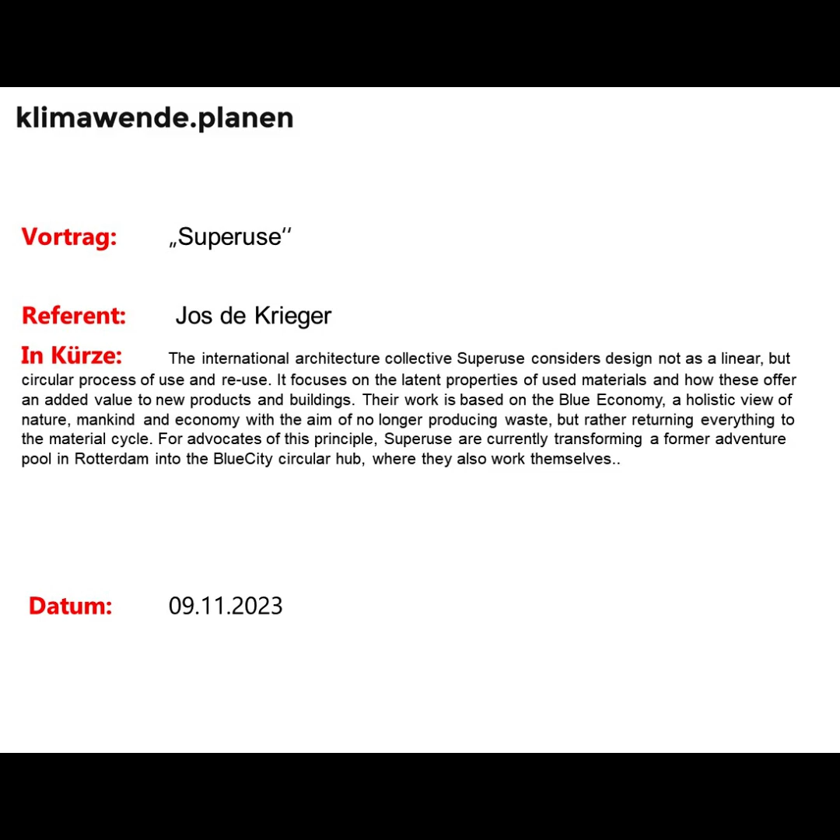Yeah, glad to be here tonight. Let's see, I don't want to see that screen.

Great to be here tonight and to talk some more to you, and great that we can do it online instead of coming to Munich again. I hope to be back sometime soon, maybe again during the MCBW, because I was there in May, as Bernhard mentioned. We'll see where it takes us.

Tonight I'm going to tell you two things. I'm going to talk a bit about Superuse and the theory behind our work, some of our projects where you see it come into practice, and one of the projects that is sort of a dear child of mine, BladeMade, that is going through all these years. It's not going to be chronological, so just bear with me, and please feel free to ask questions at the end.

Recently we started to call what we do the architecture of transition, because we see that we are in a phase where society needs to change. We need to transition, and change feels like something sudden. Transition feels like something slow, because the things that we want, the things that we envision, are not going to happen overnight.

Actually this year we are a 25-year-old office. We started at the end of 1997, and we're a pretty small group. I joined in 2006, so not from the start, but a pretty small group working out of Rotterdam mainly, but I also have my place in Amsterdam where I am right now.

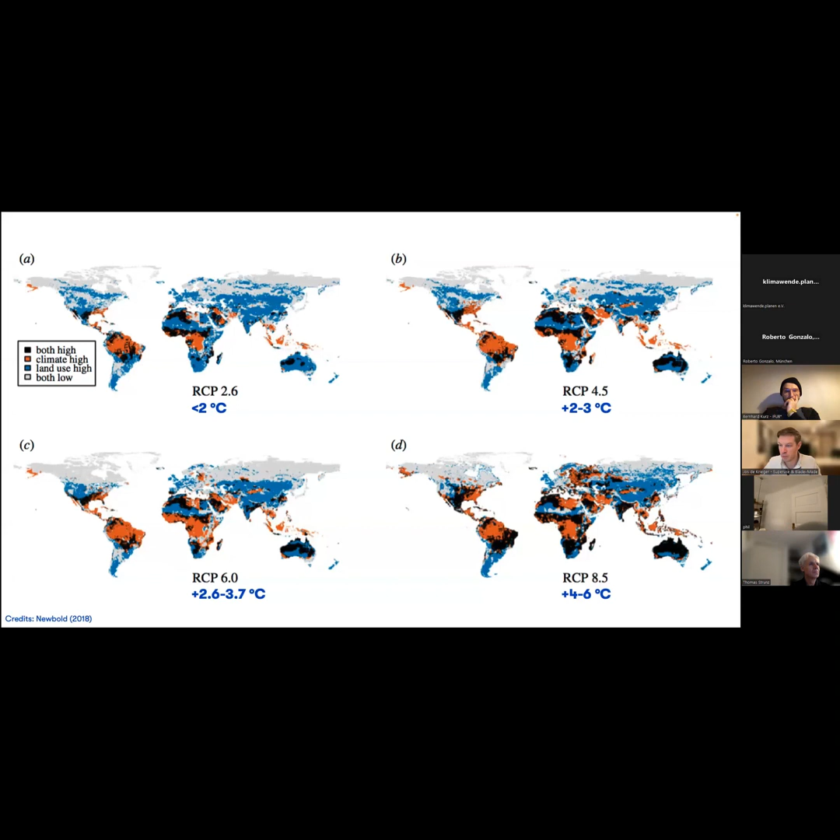Actually, the most right-wing parties that are anti-migration should be heavily into climate measures, because that is the main thing that can help limit migration.

Some things might be really hard to achieve, like a social foundation of housing for everyone without the problems we have in land conversion or biodiversity loss. That is not answered by these schemes yet. That is something that we, considering most of you are also architects, have to answer, in my opinion. With Superuse, we look at that in a way to go towards regenerative architecture.

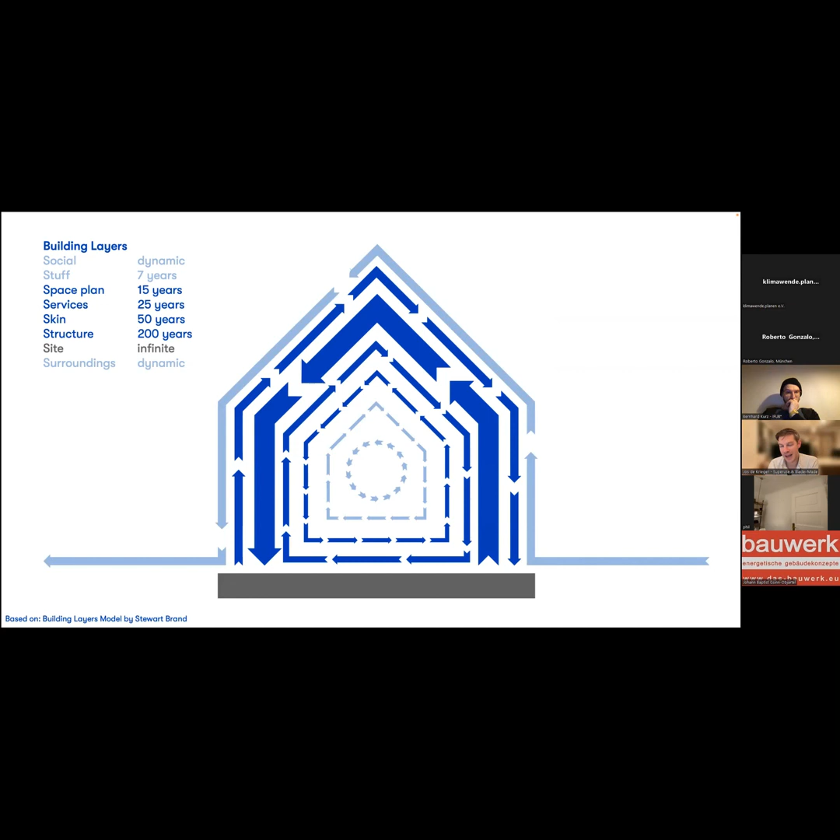And the way we look at that is by making buildings build up in layers, like the Stewart Brand model, where the most important thing is that things are demountable. So you can take apart and reassemble infinitely, or until a certain material is really end of life. The other thing is a very simple decision tree that we use in the office.

Prevent first. So if a client comes to us and asks for a building, we will first see if we can solve his problem without making a building, which is unlike what architects normally do. But maybe he doesn't need a building. Maybe he needs a different business model, or there's a building nearby that would be suitable, so you can reuse an existing building and transform it.

So it's really weird in a way that we don't necessarily want to build as much as possible, but we want to leave positive impact as much as possible.

The way we do that during a project, looking at materials that we use, is we aim for reused materials, preferably local or regional, depending on what's available. If that's not available, we'll go for bio-based options. After that come the recycled versions, so recycled aluminium or recycled concrete or recycled whatever. It's not necessarily bad, but it's usually better to use bio-based. And if those recycled versions would not have been recycled but reused in the first place, well, that would be even better.

And of course, in most projects, we can't really go around conventional materials still. But if we have to use them, we'll try to go for reusable in the next phase, next life. So we always think about the demolition of our own projects as well, or recyclable, or at least durable.

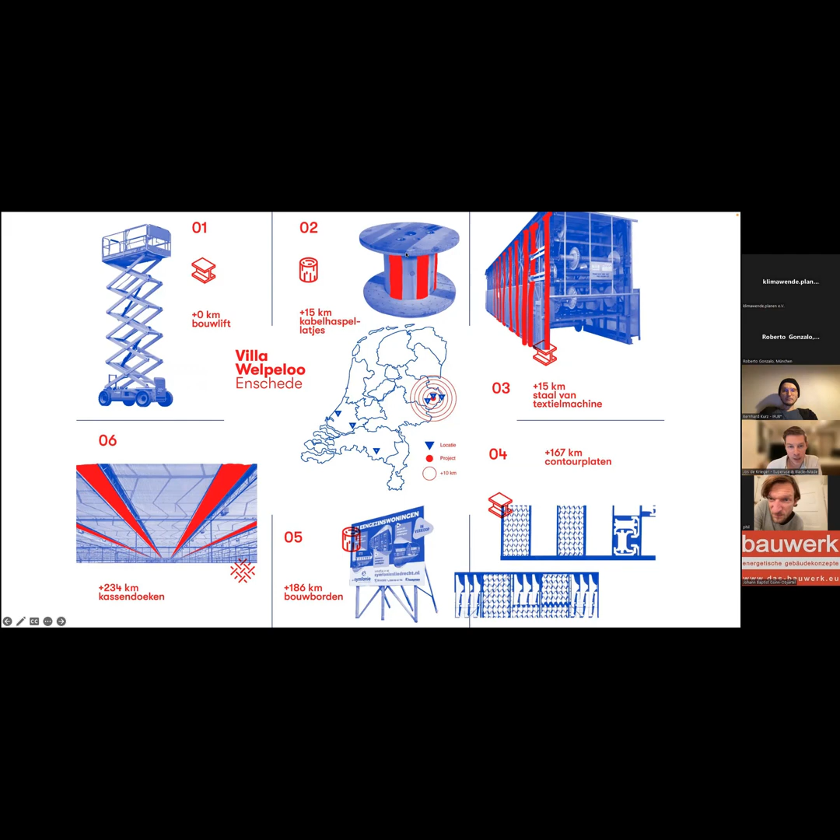So for the facade, we've taken these middle slats out of the cable reels. They have no nails; the only thing they have is some sort of bites taken out of them. You'll see it in the next picture.

But that is still reuse that you see, which people could call aesthetic reuse or something like that. But it's more than that - the insulation on the inside and the steel structure that you don't see are completely reused.

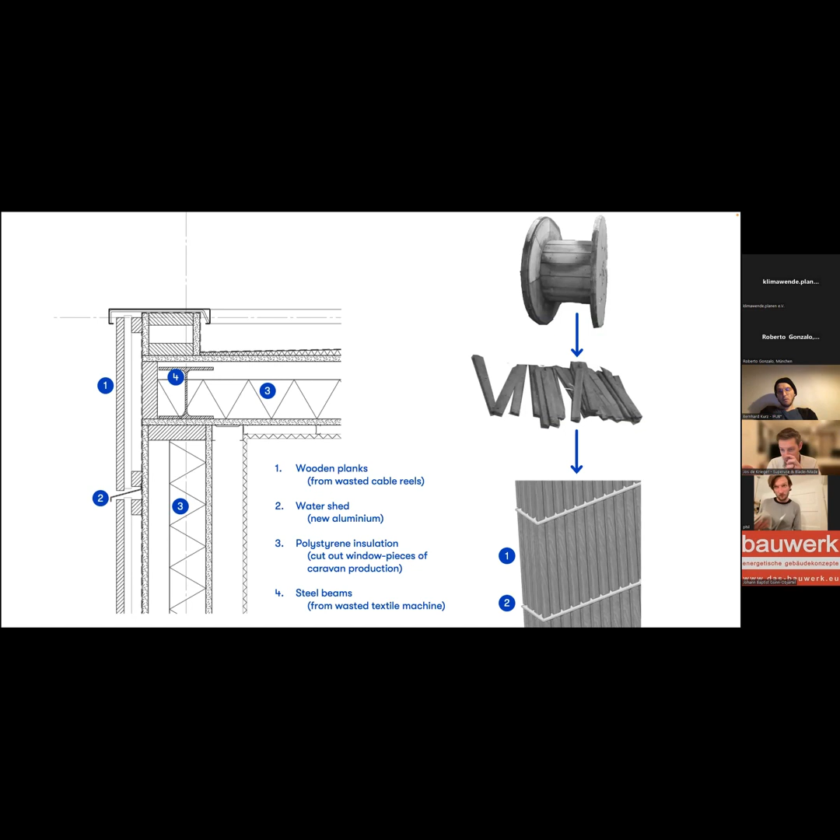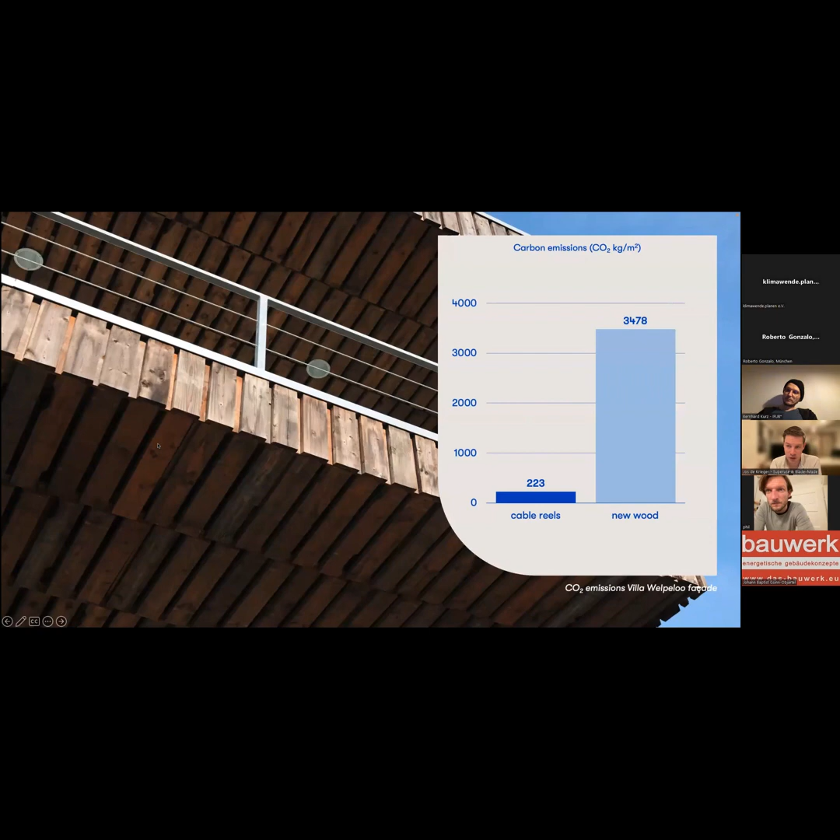So for the cable reels, here you can see some parts on the left, for example, where the wood is not perfect. And that's something we actually like because it gives another story to that facade, to that building. Reusing that wood roughly saved 95% on carbon emissions compared to conventional wooden facade solutions.

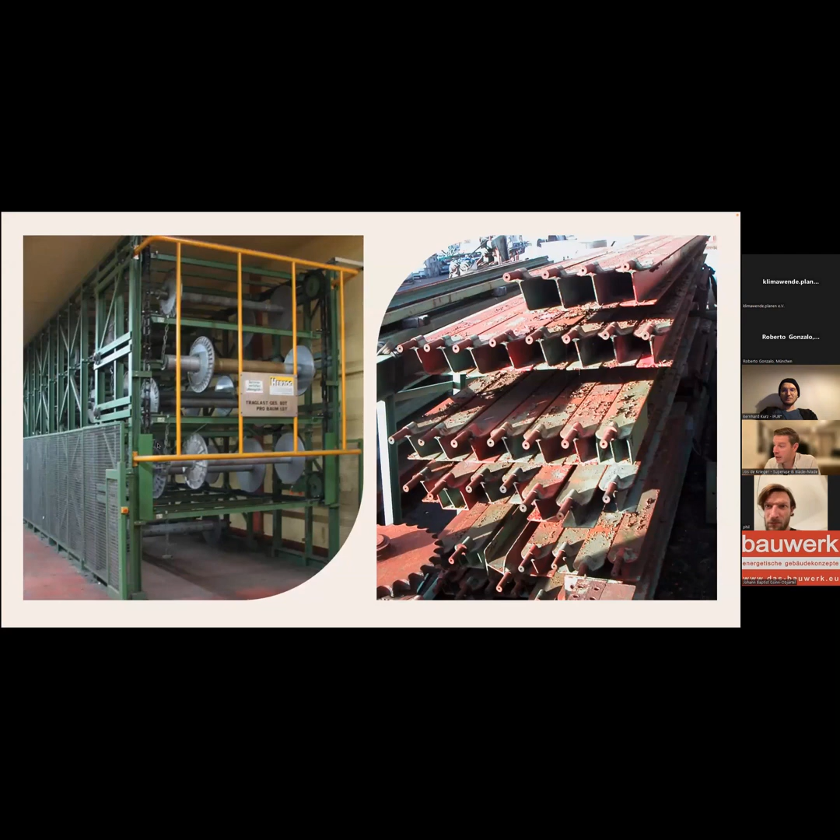Then for the steel structure, we used this textile machine, and these beams were just lying around. We didn't know the quality of that steel, which was of course a problem because we wanted to construct a house, we needed to get a permit, etc. What we were able to do was tell a structural engineer to calculate how much this steel could handle if we assumed it was the worst quality of steel available around the time that machine was constructed. And if that would suffice, then probably the permit would also agree it would be enough for a house. So that's exactly what we did, and that's also how we got it approved. And by reusing the steel that was available, we roughly saved 90% on carbon emissions compared to a conventional new steel building.

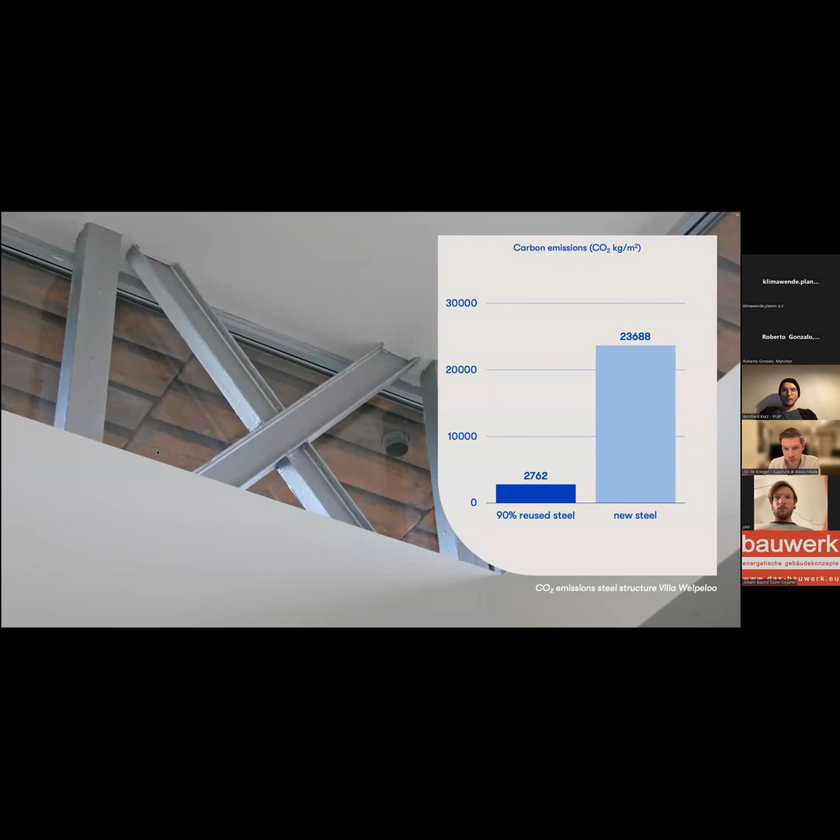This villa was completed around 2008, so roughly 15 years ago. It's still standing, the facade is looking good. Of course it became a little grayer, as you could see in the first picture. These grayish curtains are curtains that we took from greenhouses, where they're used as sunscreens. The cable reels are reused. The window frames are new and proved to be actually one of the most problematic parts during construction. But the residents are still living there happily, and I'm looking forward to see what happens in 10 years, or even 35 years from now, when the building changes again.

More recently, a project we did in Eindhoven, also somewhat in the south of the Netherlands, where we were asked to renovate an old school building and make an extension to it. We're always happy to do renovation because that keeps old buildings intact, but not all functions are suitable in a renovated building. So in this pavilion, where they host openings and art exhibitions, there's a bar as the main function. It's here on the brink of a workers' neighborhood and the former Philips factory terrains, close to where the Dutch Design Week is held.

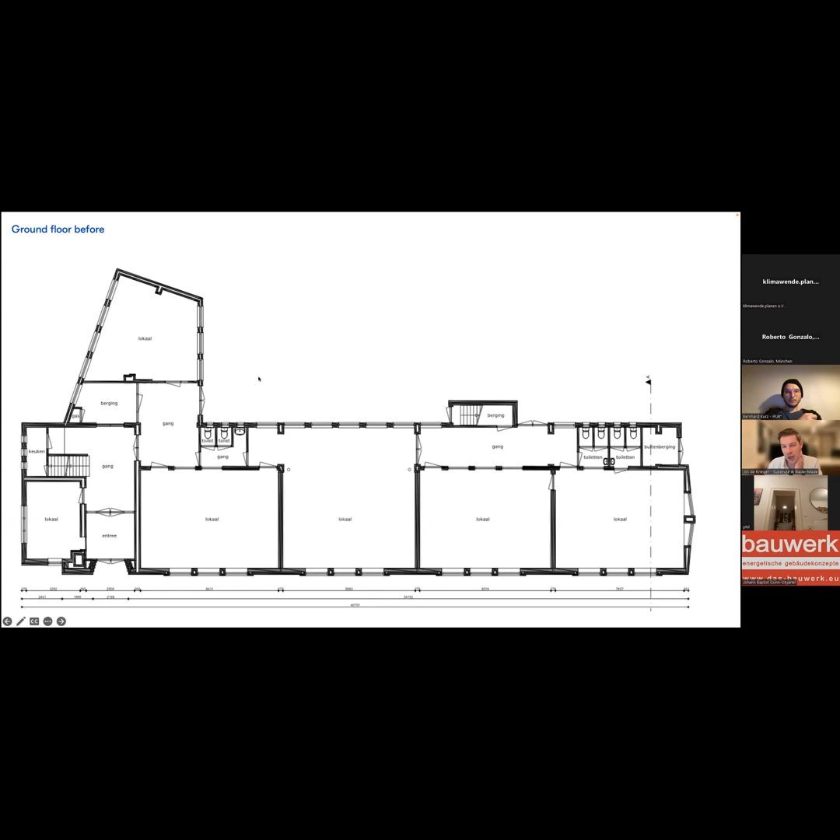People who used to work there are now living there, and it's close to the city center. This monumental school building was going to be renovated, but over the years some things had changed, like this hallway being blocked by toilets that were added at some point, so it wasn't really the school building it used to be. We changed that, went back to the original positions, and added a building on the schoolyard for the kitchen and the cafe.

Again, we made a harvest map, and some of the things we could harvest came from the former factory terrains of Philips. Some came from a little further away, but altogether most of it was found in the Netherlands, within roughly 100 to 150 kilometers from the site.

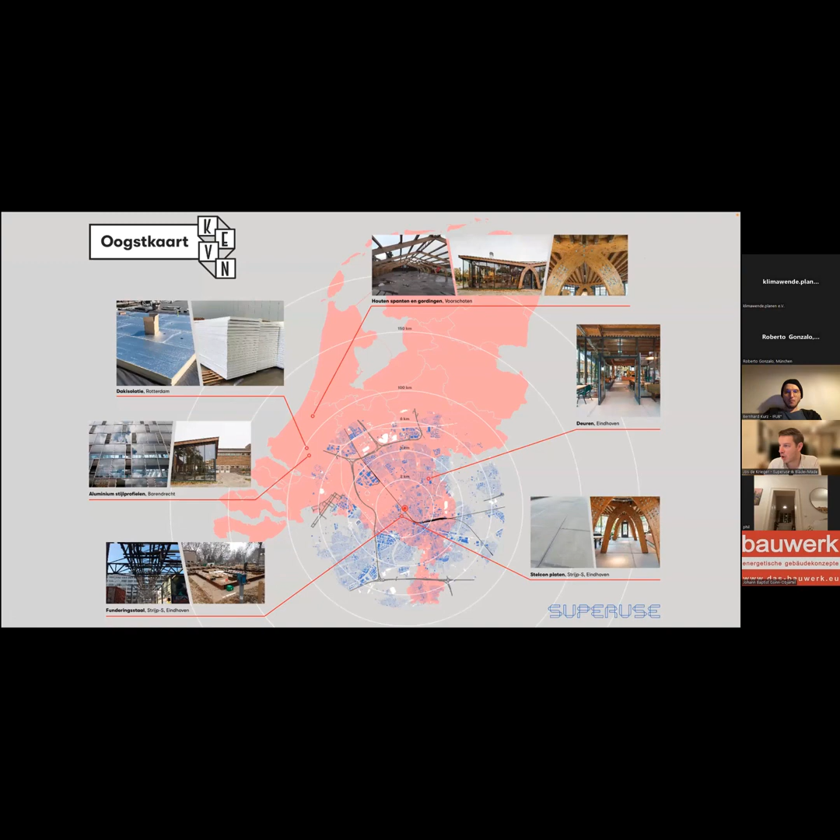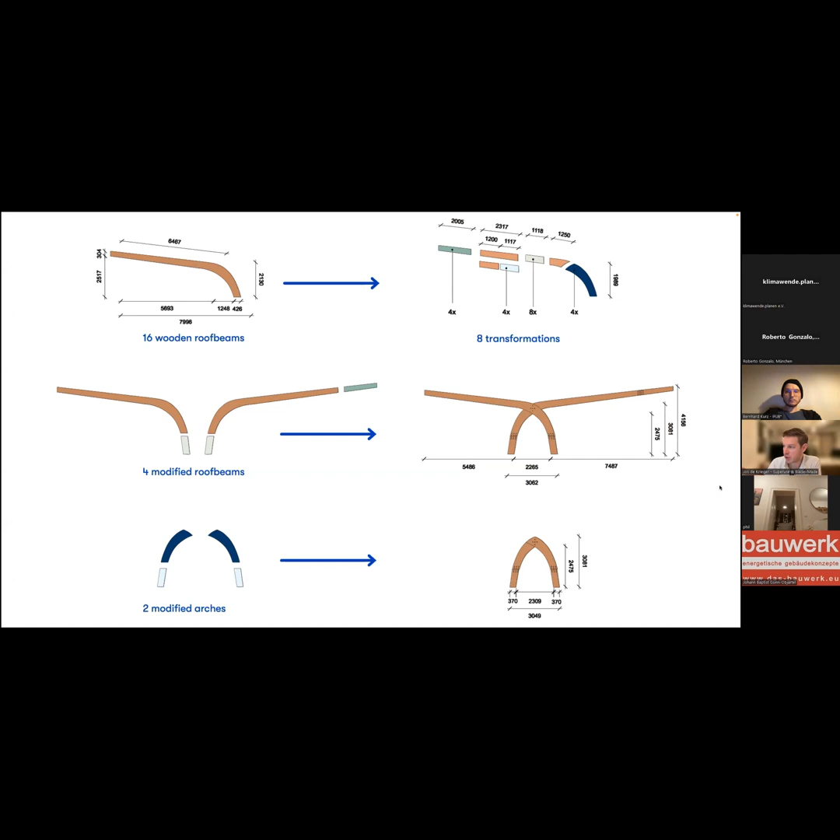For the wooden roof beams, we found a former goat shed standing on farmland somewhere. By cutting it and measuring it precisely, cutting it into certain pieces, we could make it a little higher to make it suitable for human use, to walk under and create that cafe space.

With just these few cuts, we had to add metal plates in the middle and a lot of bolts to make it a structural connection again, but we like that kind of expressiveness. The wooden beams in between are just the beams that were already in the farm shed before. And the whole thing is demountable.

There are no foundation poles. There are 3 layers of Stelcon sheets, reused concrete slabs, for the bottom structural layer. Then there's an insulated layer, and a floor heating layer. So we've reused existing concrete slabs to create a heated floor.

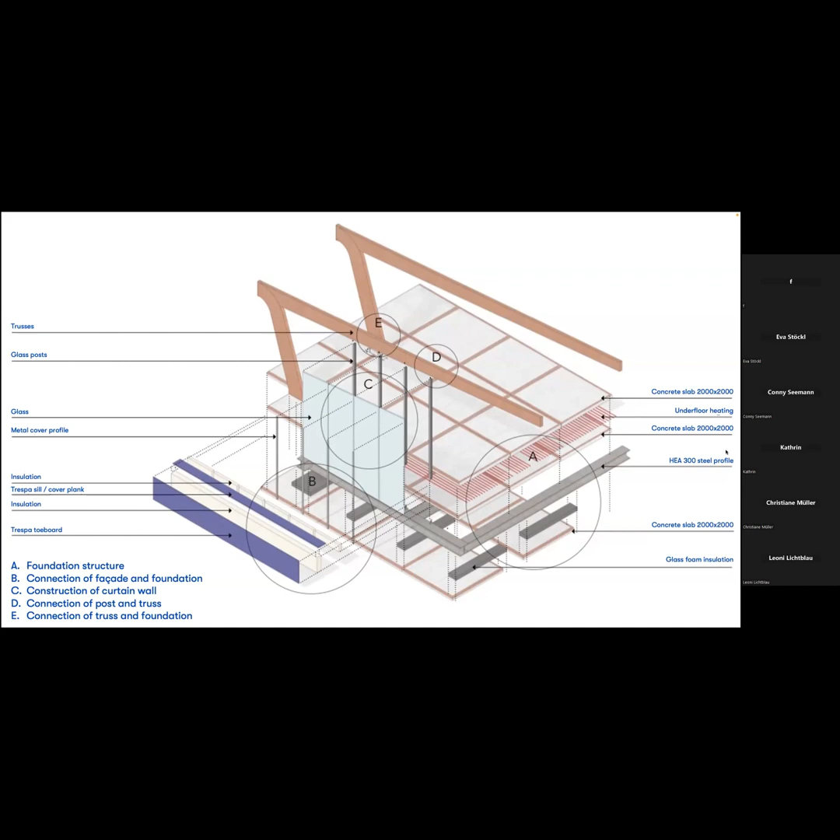Well, this space has now been in use for, I don't know, 5 years or so. And actually here in the back, you see the photographer was busy, but I was also giving a talk for a German TV program at the same time. So that was quite funny.

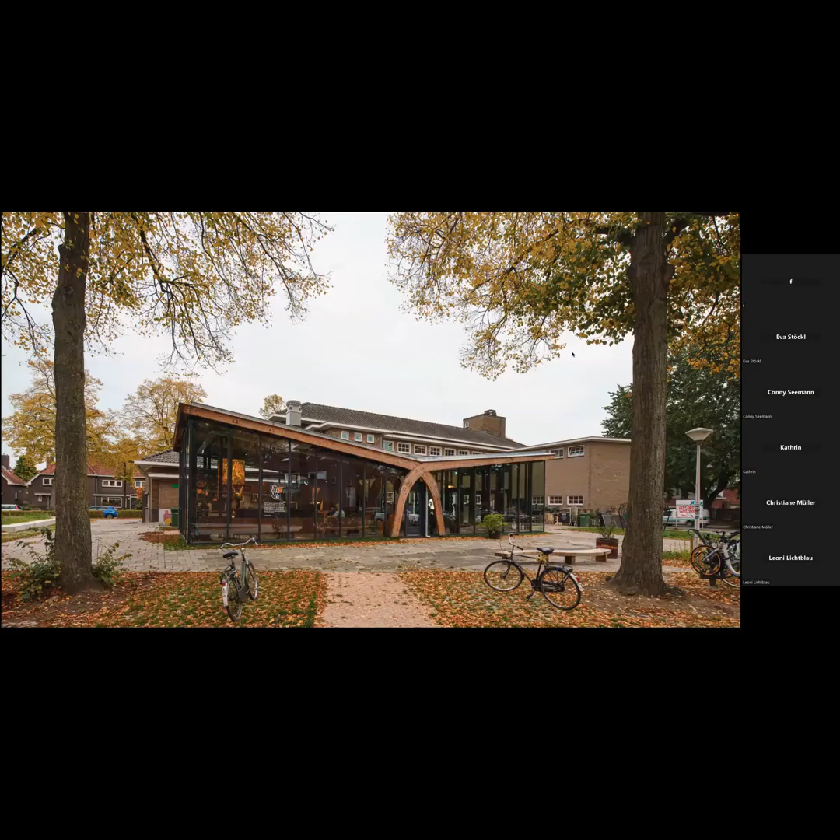But yeah, if you are ever in Eindhoven, go for a visit. Or when you're in Rotterdam, stop by at our office. It's also a pretty special place.

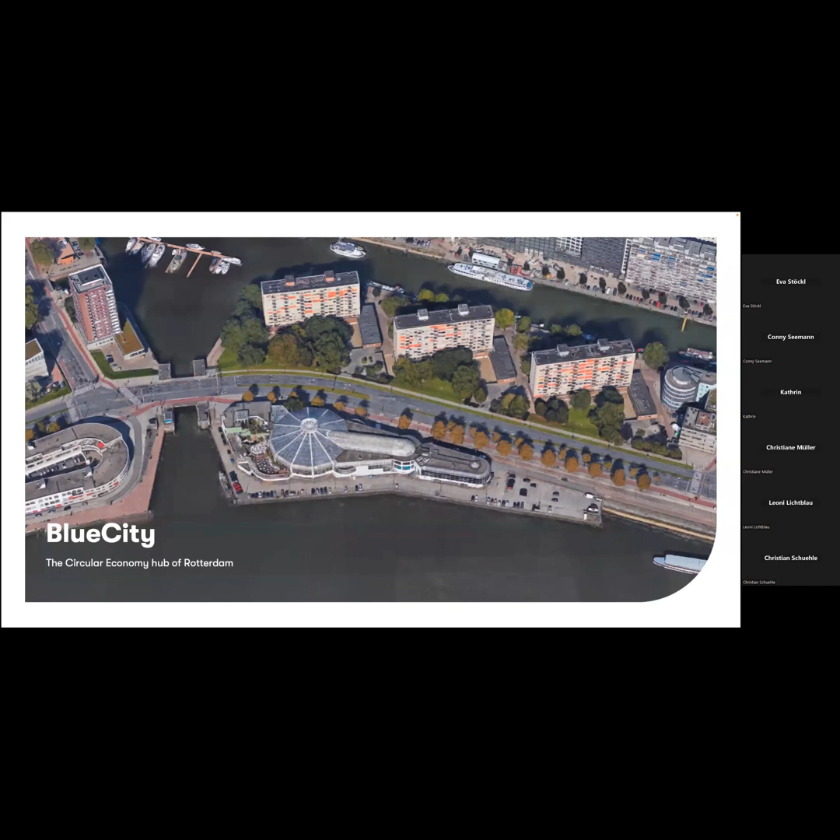This is a former subtropical swimming pool. So when we found it, or how it was originally meant, was like this. But at some point it went bankrupt, it closed. And of course, all the water was gone.

We were already inside a couple of times because we harvested the plants for our office and some hotels like the Hilton, which were nearby our office back then.

But when we came back years later, it was like this. All the plants that remained were dead. The water was gone. It still looks like a swimming pool, but it feels completely different.

It feels like a sort of urban photography setting, where you go into these ruins. But it was still actually in quite a good shape.

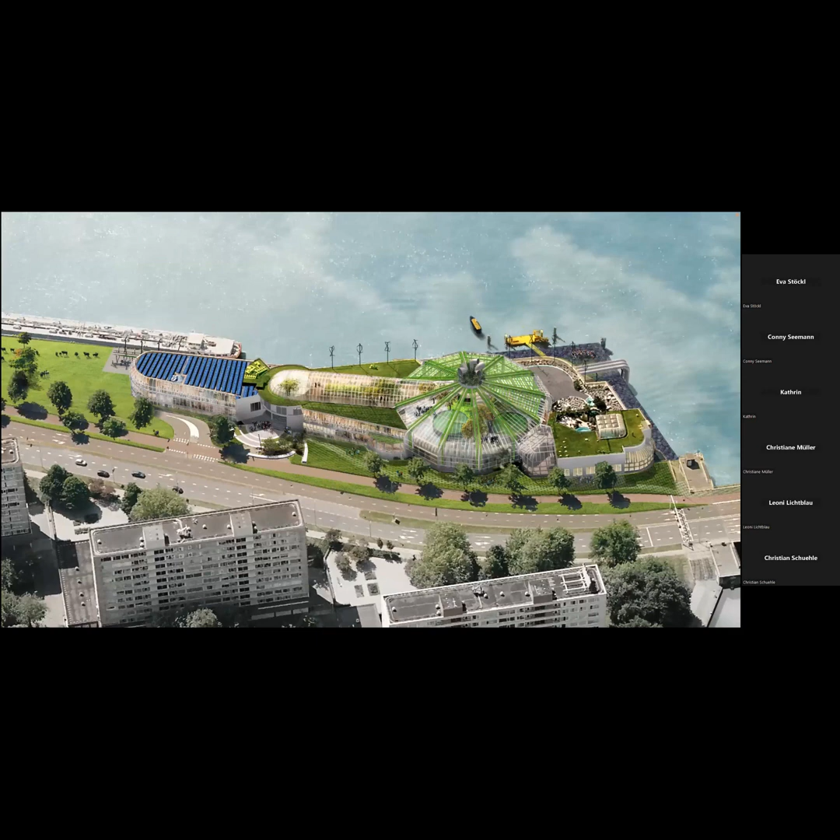And it was going up for auction. So we came together with a group of pioneers with a plan to say, can we save this building from demolition? Because normal project developers would demolish it and go for housing.

But as you can see in this picture, there are some pretty big apartment buildings next to it that have riverside views right now. And if a developer would build something new there, that would probably mean years of conflict with the neighbors about obstructing their views, etc.

So we thought we might have a shot at buying that building at an auction. We found an investor and a couple of pioneers with a plan to transform this monofunctional monster into a circular city of the future.

We actually managed to purchase it with the plan to not go for one grand design that takes 5 years of construction, followed by a grand opening where we then see how it goes. Instead, we go in with the plan to transform it steadily, basically treating it as a continuous renovation and reconstruction where companies move in, companies grow, companies move out.

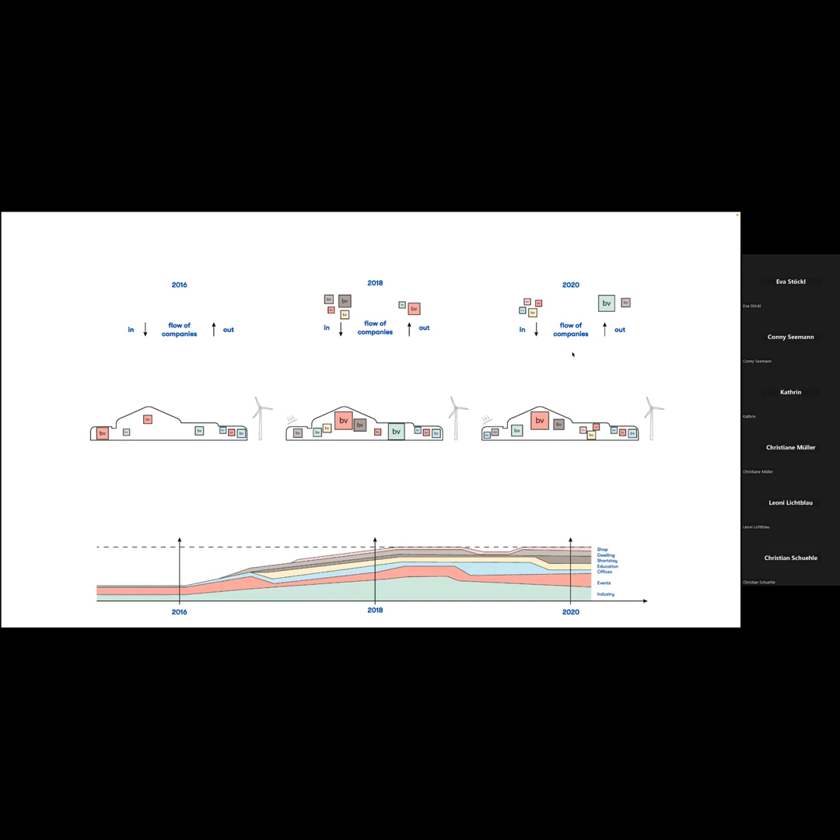So we've actually had our office in 3 separate spaces in this building already, smaller or bigger, depending on the vacancies available or the size of our office at the time. We shrunk a bit during Corona and rented out one of the other spaces that we didn't need anymore.

Over the years, we would like to see all these companies connect their energy flows together, connect their value flows and their physical flows, so that they cooperate, learn from each other, and use each other's materials and waste flows.

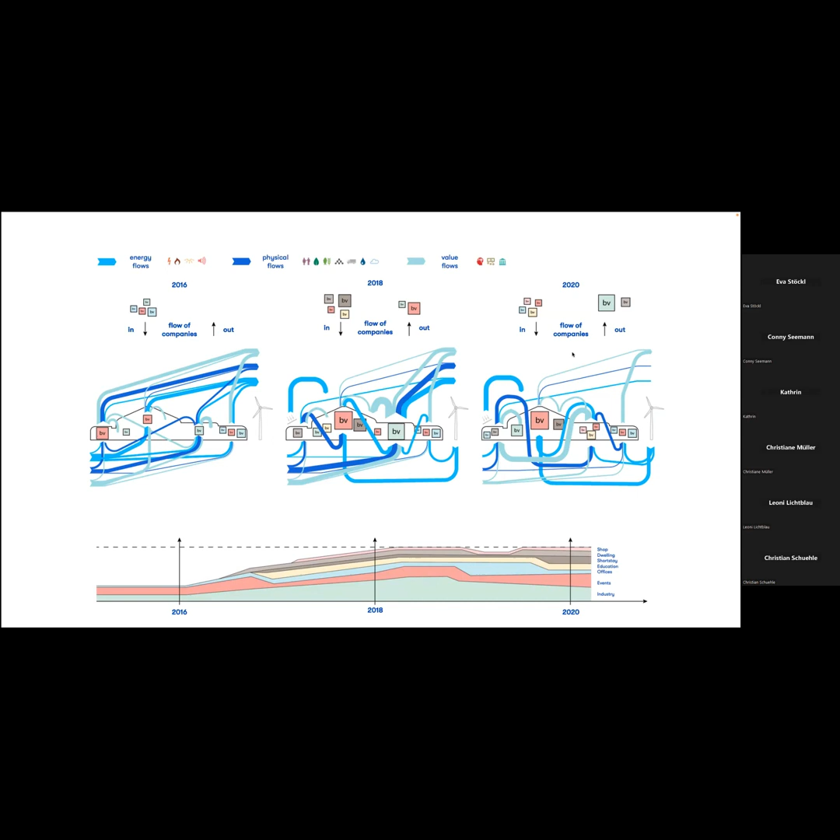For us, of course, as architects, we are mainly looking at the building and the reconstruction of it. So some parts of the former swimming pool are kept intact.

But we added all the window frames to create climatized office spaces. We kept the VIP booths, but gave them a new paint job and new upholstery. Instead of brown, red velvet and brass trims, it is now more a suitable workspace.

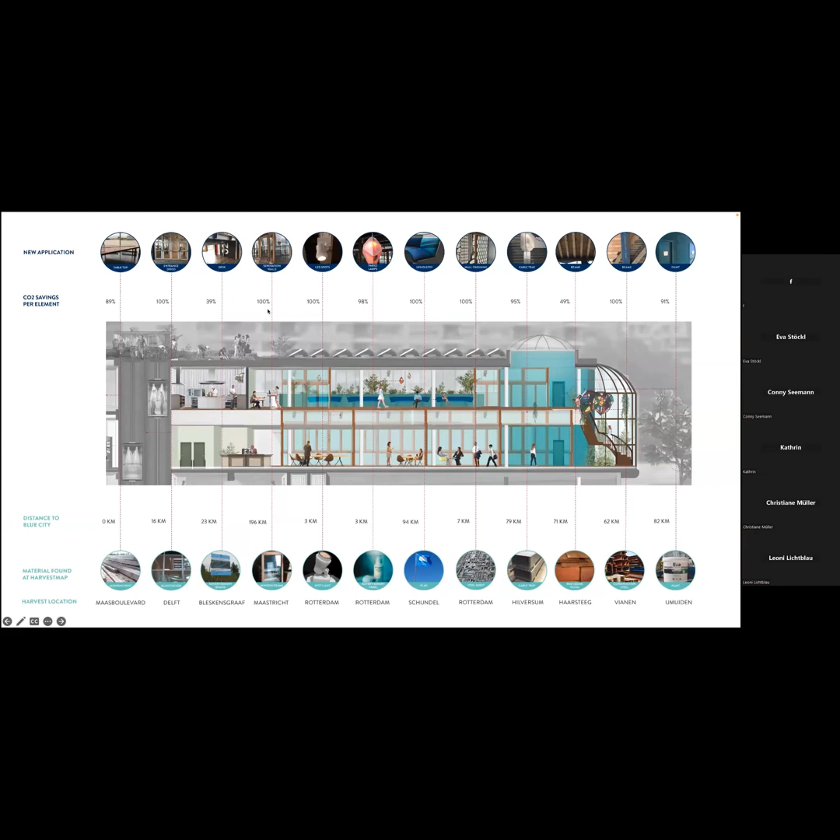So when we redid the basement, we created a dry lab and a wet lab, a place where young companies and pioneers can experiment with seaweed, fungi, and new materials, hopefully suitable for architecture later on. We did another type of map, also looking more at the carbon savings.

By reusing the materials here, we saved enough carbon to go back and forth between BlueCity and Paris 652 times, where at that moment the Paris climate conference was being held. So probably the whole Dutch delegation would have been able to go there for the negotiations, offset by this renovation.

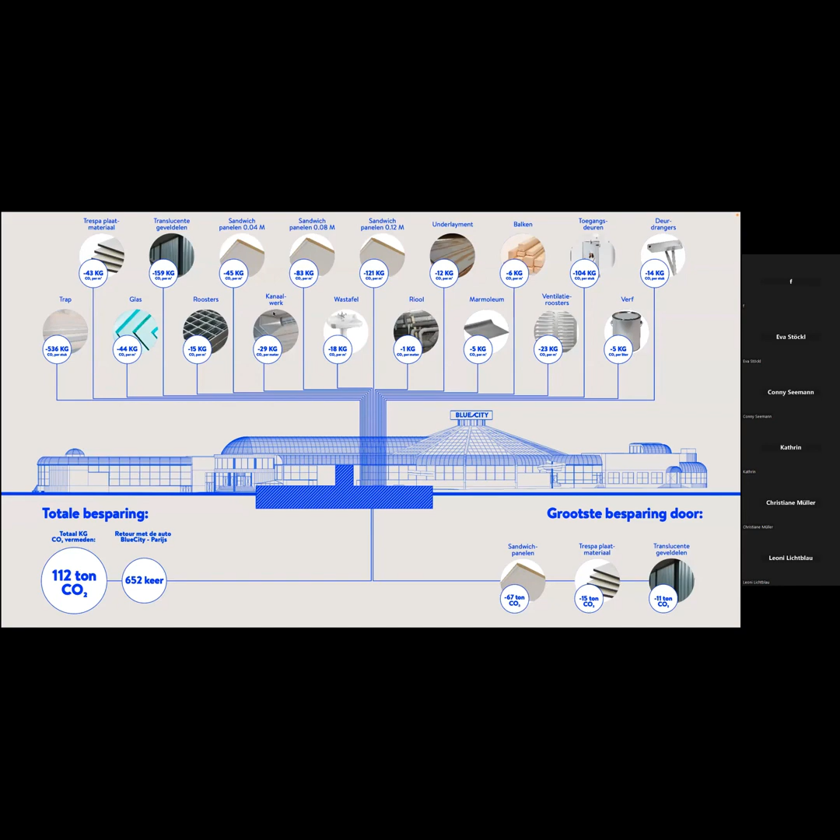Well, finally, a project that is under construction right now and almost finished. The inhabitants just moved in, but they are finishing the building themselves. This is maintenance cooperation or housing cooperation called Boschgaard.

What they did is they squatted a former neighborhood center.

And when they were asked to move out by the housing corporation, they said, well, we actually live here pretty happily. We reinstated some of the neighborhood functions because when they squatted it, of course, the neighborhood center was gone. And we are running this urban farming plot next door. So can we find a solution where we can stay here and maybe build the houses for us with us?

And actually the housing corporation, so the owner of the land, agreed. And they asked us as architect to help them with that problem.

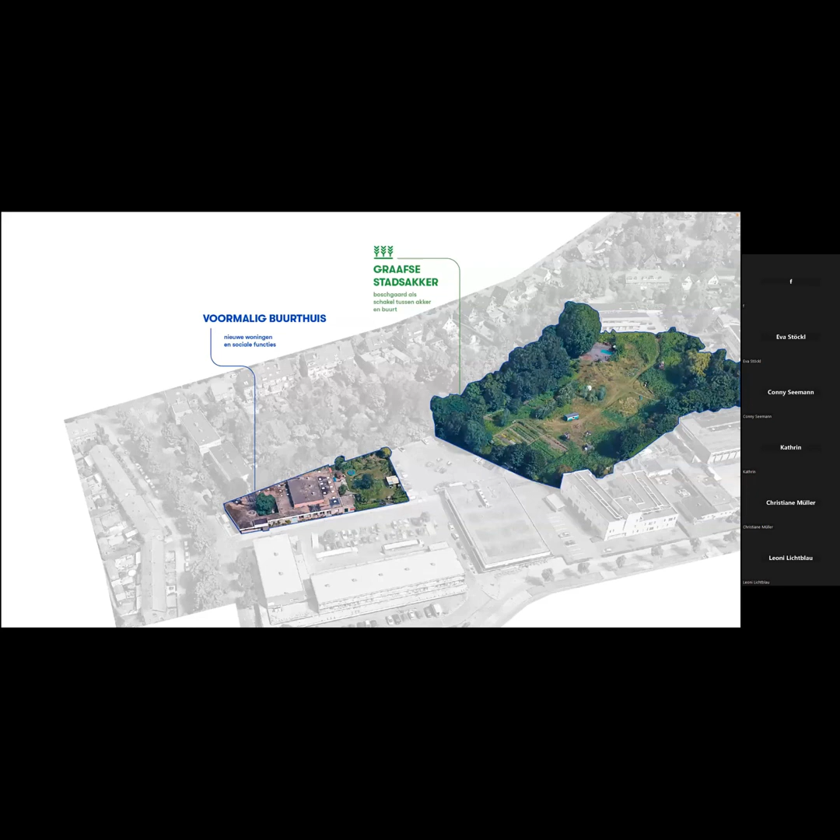To do that, we suggested to keep as much as possible of the existing building and add a small part where 5 studios are inside, where the foundations were strong enough, and 3 extra housing units where there's 4, 4, and 6 dwellings inside, for the future growth of the community as well.

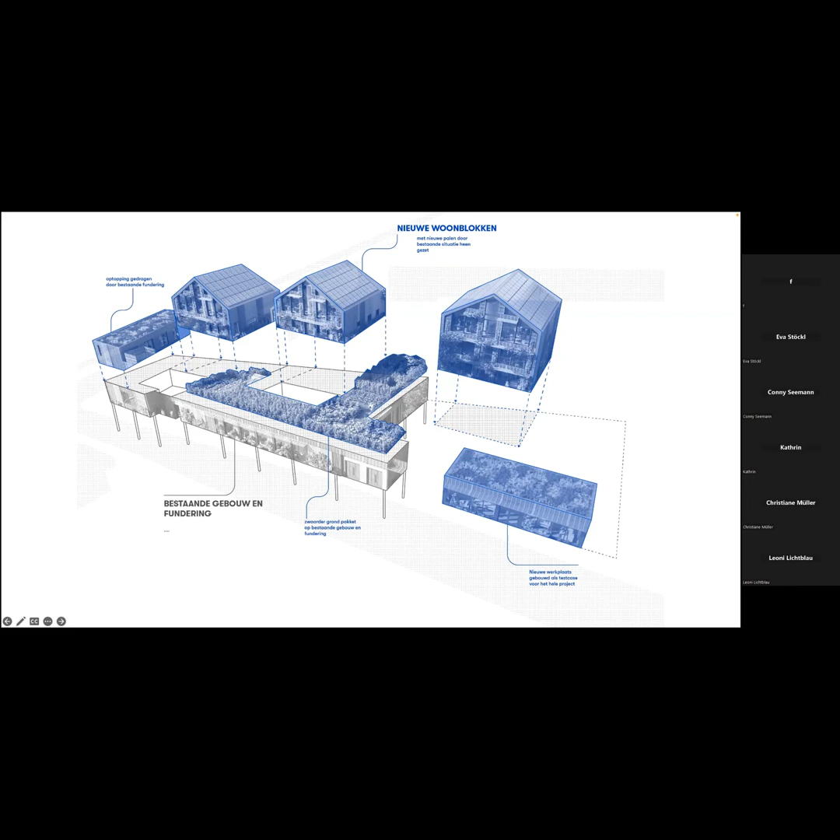But the angle of the roof, so the pitch, turned out to be a little bit different than what we had in the permit. So we had to go through a small process of permitting again, with negotiations with all the neighbors, because before we drew the pitch, we didn't know exactly what kind of material we would find.

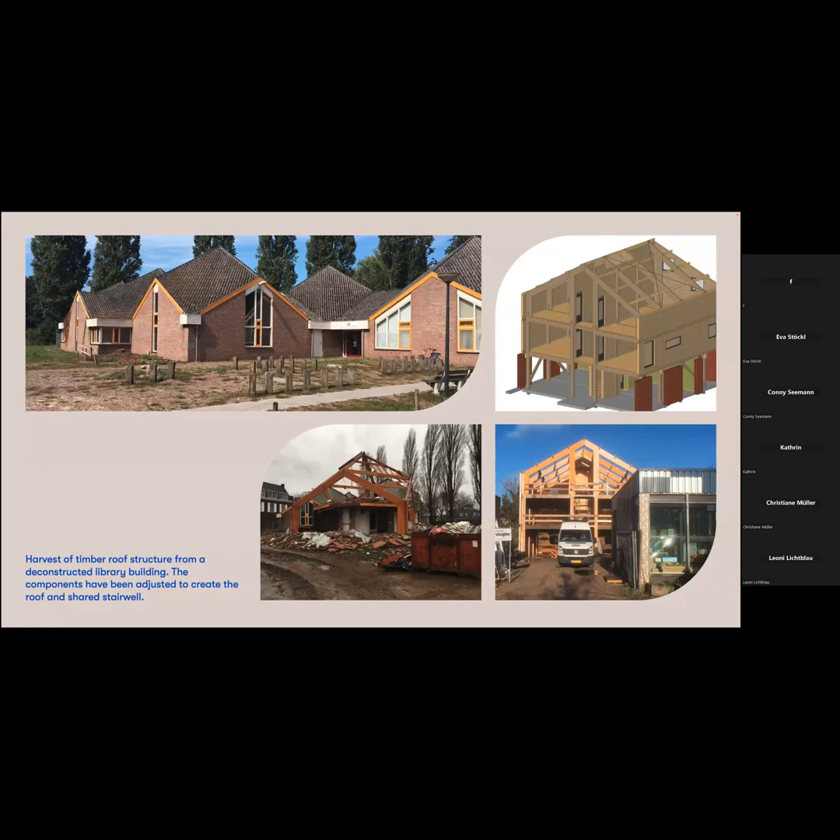But here, the whole structure is bio-based and reused. So for the top floor, you can see these parts from the library. And for the lower floors, we have these beams from a gas station that were taken down, cut into pieces, all according to the drawings of the structural engineer.

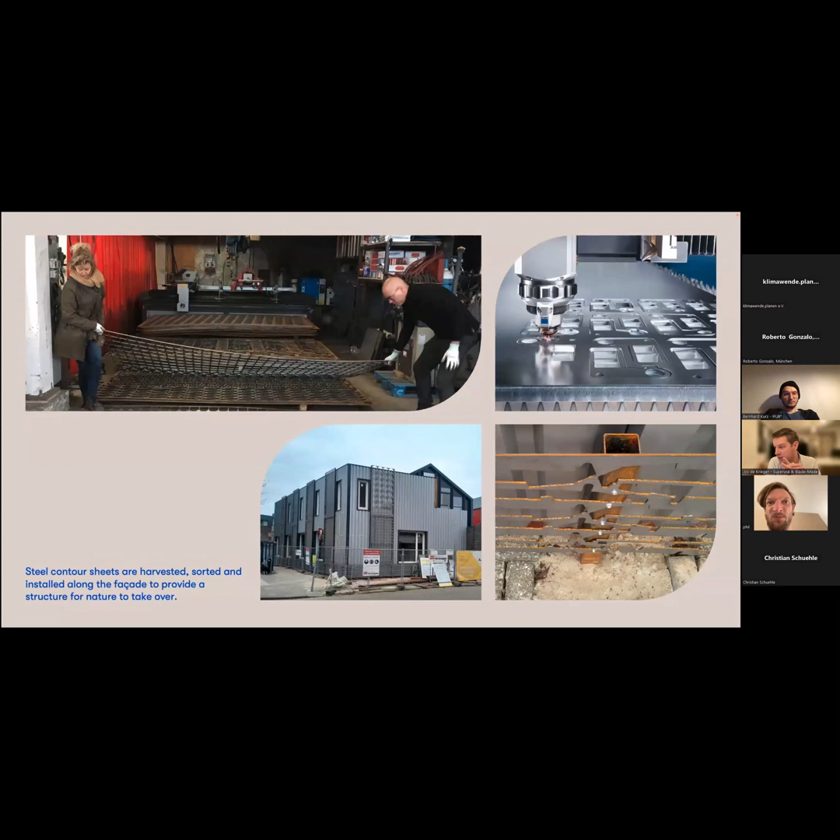And finally, some of the things that we use a lot actually are the remnants of our steel industry. So everything that we use—cars, door handles, etc.—they're usually cut out of steel sheets, and the steel sheets with holes are thrown away, going into recycling, becoming new sheets of steel. But they're actually really beautiful, usually, because there's a sort of industrialized, beautiful logic behind the way these things are fit into a steel sheet.

And here they are used to grow the plants along the facade. So you can see here they are used for the solar shading as well, in front of the reused window frames.

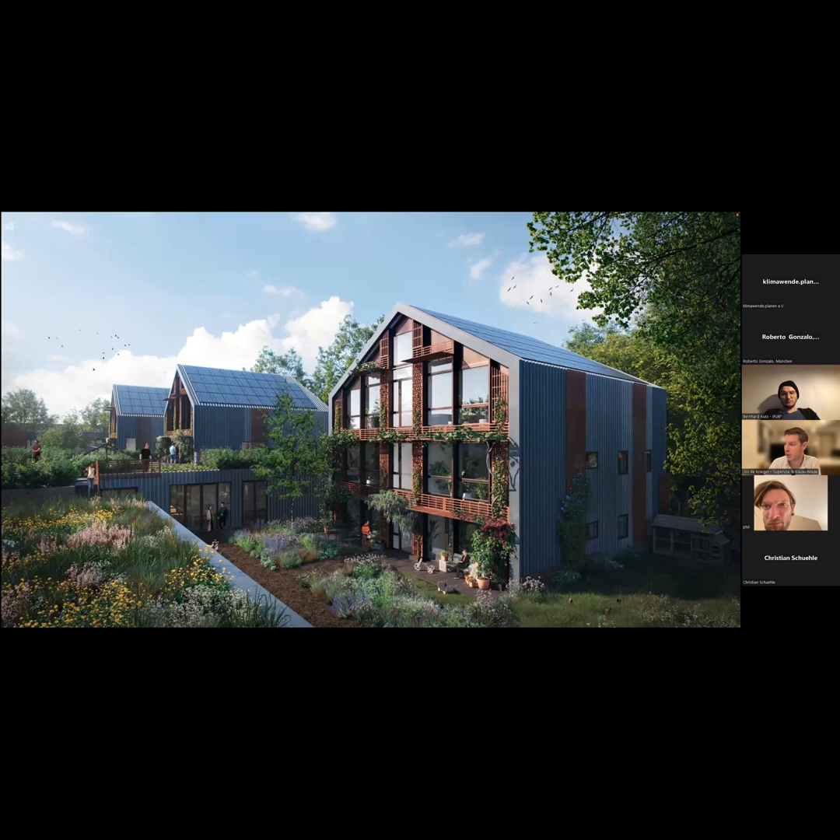The whole building is insulated with corrugated steel insulated sheets. They are available as B stock. So I would say this is coming close towards a regenerative building.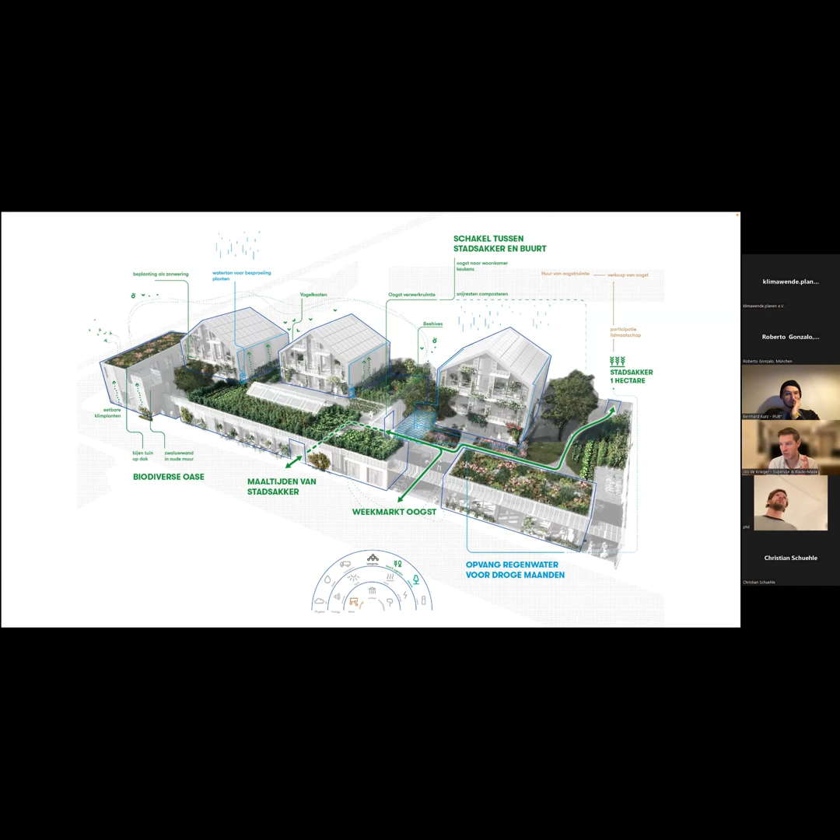They are growing part of their own food, not just on the plot of urban farming that they have nearby, but also on their roofs and on their balconies. They have bees on their own site for pollination. They have cheap neighborhood dinners that they host in their own facility. So there's a monetary value involved. There are inorganic flows, there's food flows, there's nature flows, water flows.

Sorry, my cold is playing up.

And the way we've made the housing units, they're all social housing according to all the financial rules of social housing in the Netherlands, which also meant that there was a maximum budget, a maximum cost that you can spend to make these houses. And it helps that the future inhabitants are cooperating with the contractor to do certain finishes themselves.

But most important is that their houses are not big. They're relatively small, but they have a lot of shared space. So every house has a very small bathroom, but they have an almost wellness space together with all 19 households. And by thinking in that way, you can really reduce the amount of energy that you use, not just as a family, but as a cooperative of 19 families.

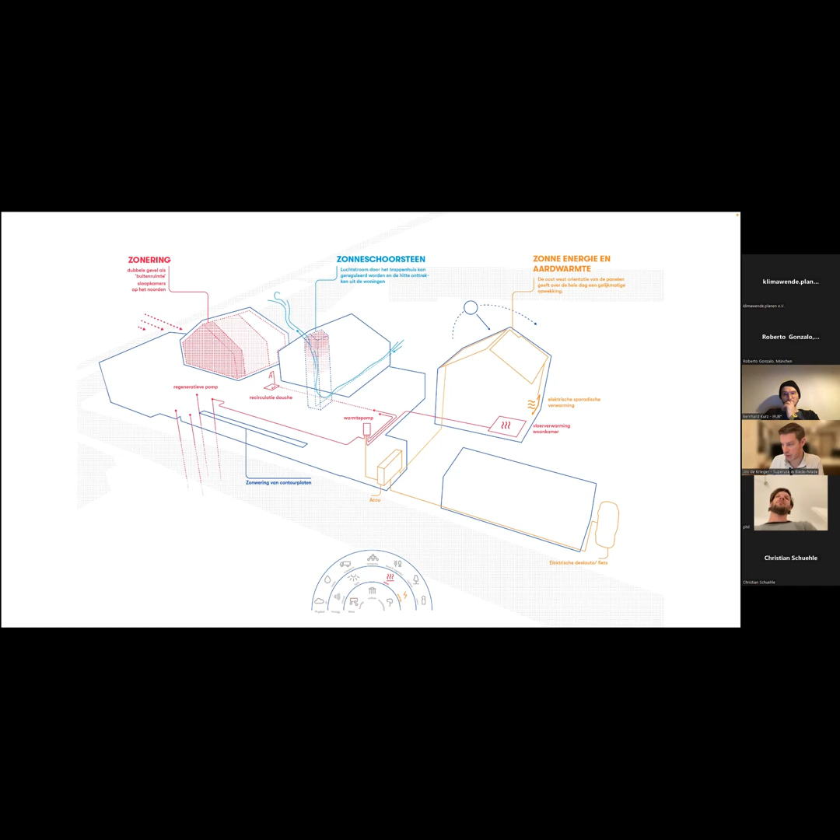Well, while this is under construction, just a couple of months ago we had a visit from the King of the Netherlands, together with some staff and people from the ministry who wanted to learn more about this way of circular construction, which is really good because it helps put it on the agenda at a lot of levels.

And just 1.5 weeks ago, Frans Timmermans also visited. I think he was visiting the German Prime Minister also last week. I don't know if it was news in your country, but it was for us.

And yeah, that's the way we would like to develop future projects, where all these flows come together, where it's not just about the building itself, but also about the community that is going to use it, etc.

I'm going to talk with you a little bit more about the harvesting principle and the different flows that we look at. This is a bit interactive, so feel free to open your mic if you want to join in.

We have a big collection of samples at our office that we've used in past projects or are planning to use in future ones. For example, different types of cable reel wood like we used for the villa - as you can see, they're all a bit bent because they used to form a circle. Or a painted version of the contour sheets, which is possible.

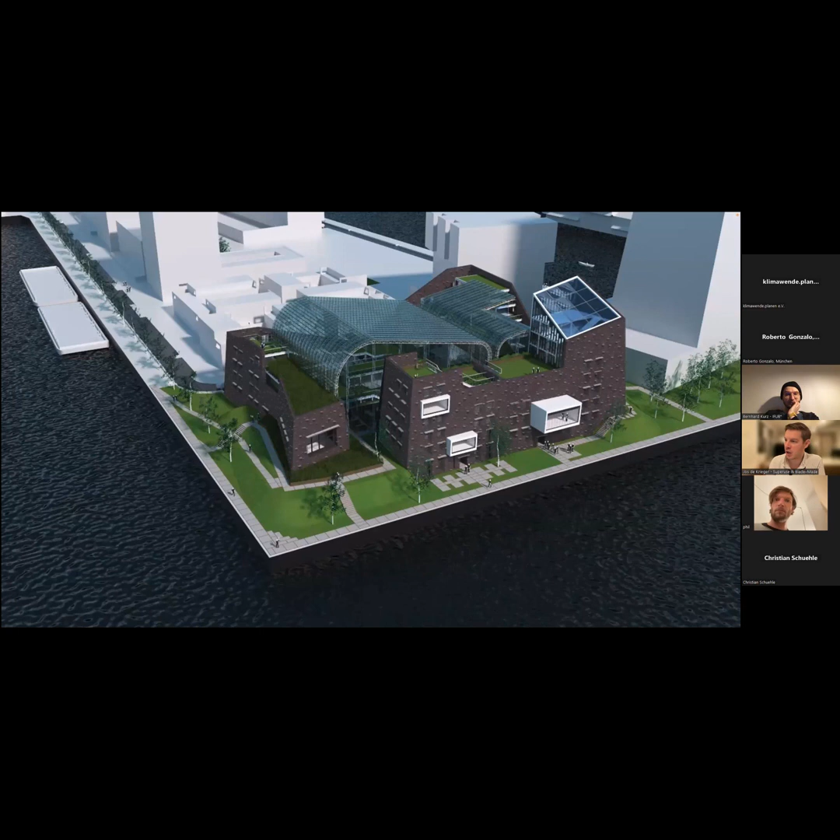Of course, this scale is showing what's possible, it's not creating impact. But in my graduation project, I designed a glass dome over a building constructed out of brick waste, where I would use 1,500 of these windshields, all of the same type. Then you can say you're making impact - if you can make structural, large-scale designs, and that's what I'll also show with BladeMate later on.

Something you're probably familiar with is construction or demolition waste - basically everything happening around the architectural field, window frames, doors, etc. They are always available, you know they will be there.

For example, this building was going to be demolished - it was only 25 years old, and had very nice aluminium window frames, high quality. We were able to make a deal with a deconstruction company that we could salvage as much as possible without getting in his way.

We got these to make a temporary exhibition for an art center in The Hague, showing cradle to cradle, Superuse, and building likeness as 3 different sustainable strategies for architecture.

But of course, after that exhibition, we had window frames left, and we weren't going to throw them away. So for another commission, we were able to create a temporary meeting space in an office building where they could judge subsidies really quickly by this revolving door.

Where artists would show their work, another one would hang up his work, and they would pitch one after the other. And most of the window frames we had left ended up in the Faculty of Architecture in Delft, where it became the espresso bar after the old faculty burned down, where we also did the espresso bar.

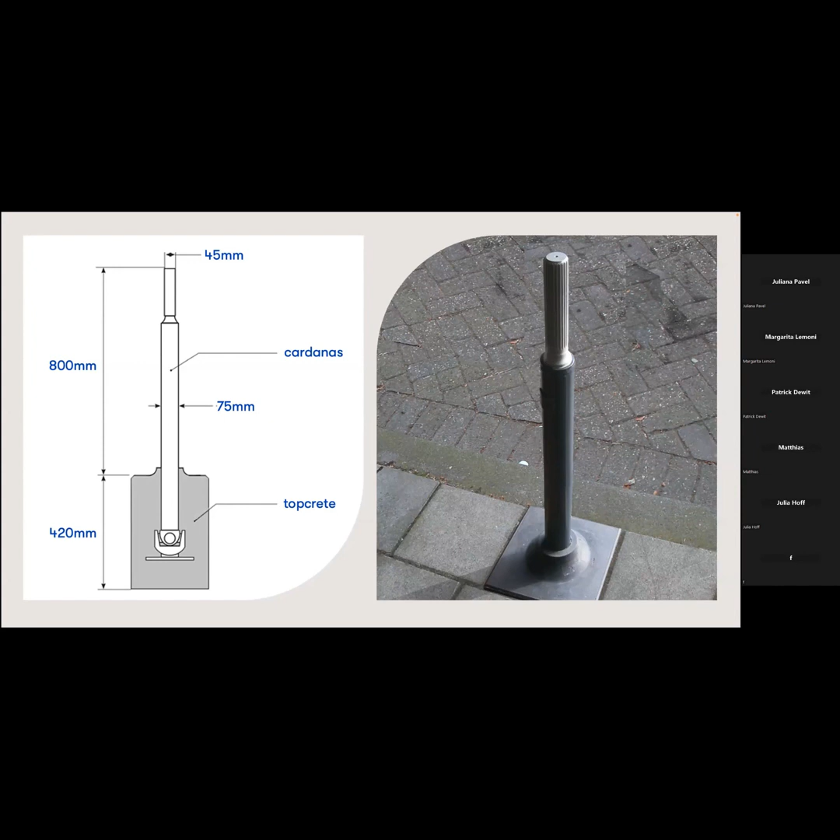And we got our hands on a few of them to do an experiment to create an alternative bollard for city infrastructure. So this still looks like a rusty bit of steel, but if you clean it and powder coat it, then it can look really nice. And if you put it into some sort of solid foundation, you can make it part of the city fabric. This is mostly interesting if there would be a company starting to do this as regular production. That is not up to us, but I think the design is free for the taking.

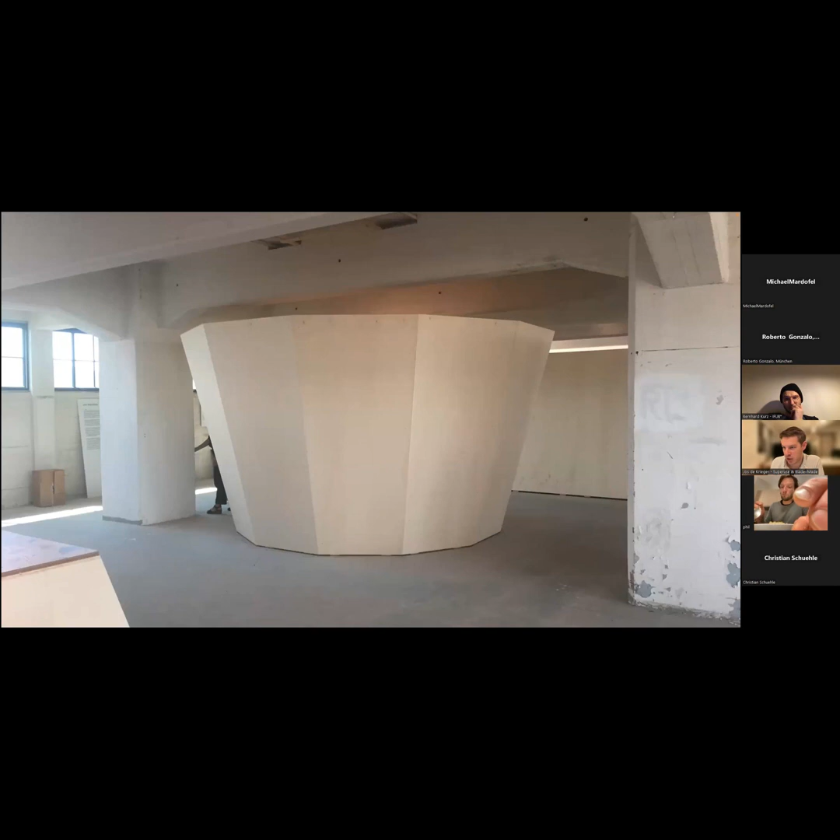Fast life waste, as I mentioned before - exhibitions, fairs, etc. There will be plenty, also in Munich and around, where you have a really nice installation with an exhibition inside. We were actually part of the exhibition inside this small cubicle, and we said, okay, can we have it after the exhibition? We don't know what we're going to do with it, but it's a shame that otherwise all that nice wood will be thrown away. And we converted it into a meeting space for our office, adding some train windows that we had lying around.

And it just proves to show that there is material available everywhere, usually sort of hidden in plain sight, and you just need to be aware of it.

Finally, with production waste, there's again lots of it. Every industry has a waste flow in their production, either because they are creating excess materials because the client asked for a certain color and they don't want to run out of it while still dealing with that order, or whatever. But we went to a place like this that was creating these corrugated steel sheets, and we asked for all their leftovers and made a composition with that for one of these industrial boxes around every city. And while we did that, we also bought new conventional doors with safety locks etc., matching the colors of the materials we found before.

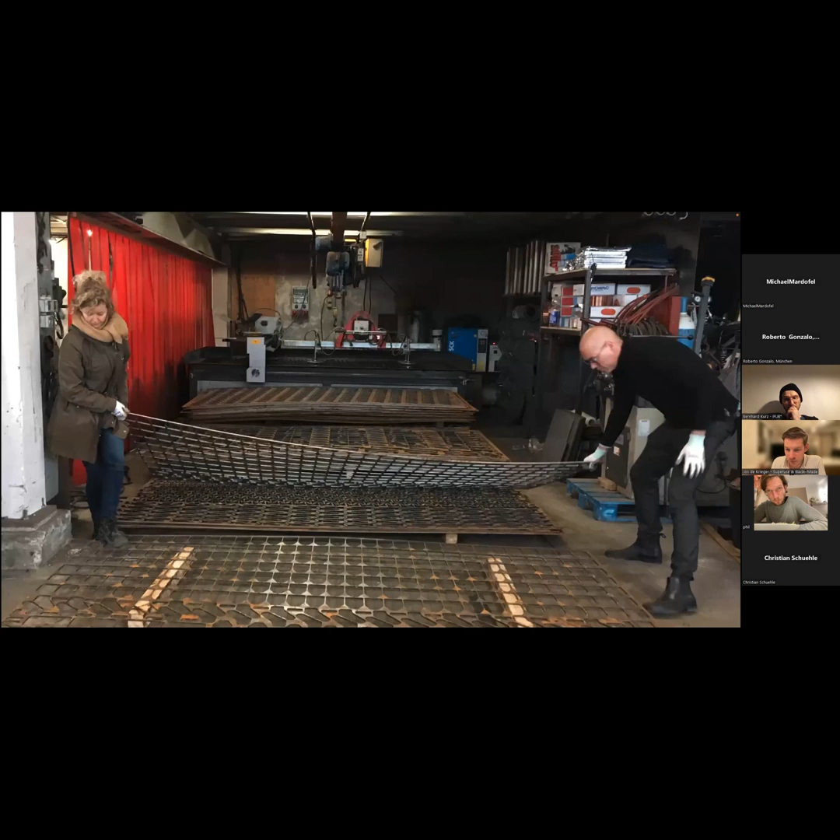I've shown you the steel contour sheets already, they are part of that as well - so the construction or industrial waste, which is going in large quantities. But the interesting thing is when you start to use it either in interior architecture for railings along stairs or balconies, or as a backdrop in a modern pantry in an office building, or as a secondary facade to an ugly building that is going to be reused for a couple of years, then you can really create something new with an interesting aesthetic very easily.

And recently we started delivering this material to other companies as well, like in this example, another Dutch architecture firm, or a rooftop extension terrace, or just a modern office building with a nice looking balcony.

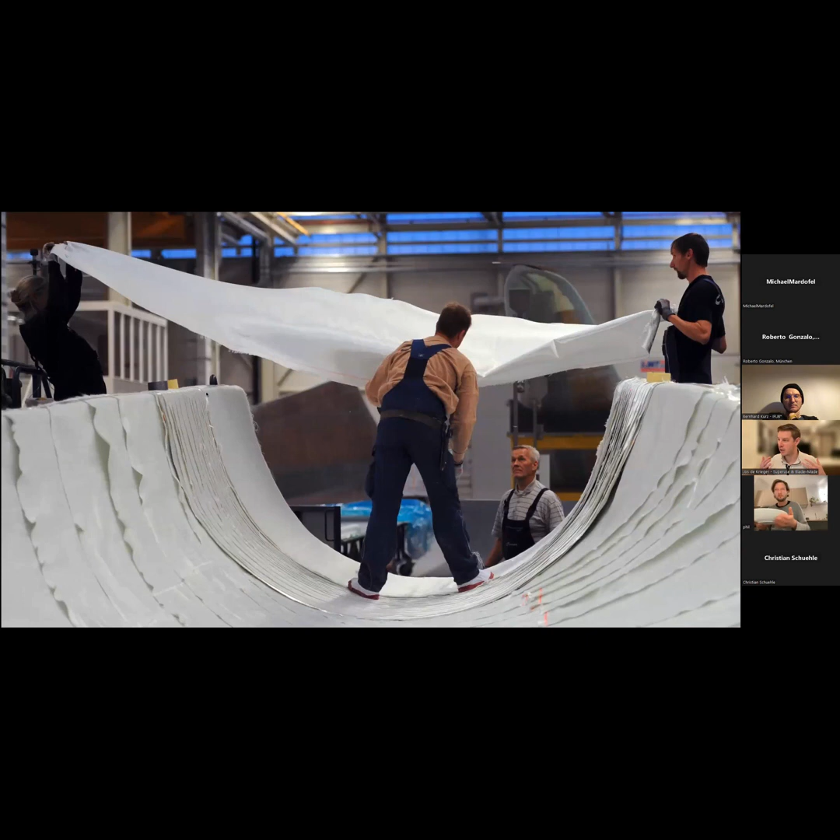Also, these blades are becoming bigger and bigger. But actually, the first generation of blades is partly handmade - it's a craft to build these things. It's not easy, there's a lot of knowledge and money invested in making it. And currently we are at the end of life for a lot of wind turbines that were built in the early 90s.

That means the blades become end of life. Also the towers, the nacelles, the foundation - basically everything becomes end of life, because that generation of windmills doesn't exist anymore. Most companies are not producing that type or size anymore.

15 years ago, we stumbled upon that problem, or that opportunity, where my colleague was inspecting these blades to see if they were suitable for architectural designs. Back then, it was definitely still possible to either cut them into small pieces and put them in the incinerator, or as they do in the States, to landfill. In Europe we have a landfill ban on glass fiber reinforced polymers, but burning them is still not really a good solution.

With the first 5 blades that we obtained, we were able to build a playground in Rotterdam. These are 25, 27 meter long blades cut into pieces. You can see one here in full length, but the other 4 are cut up.

The reason to cut them was mainly to remove damages that happened during transportation or other things. So that's why they might have a weird angle like that.

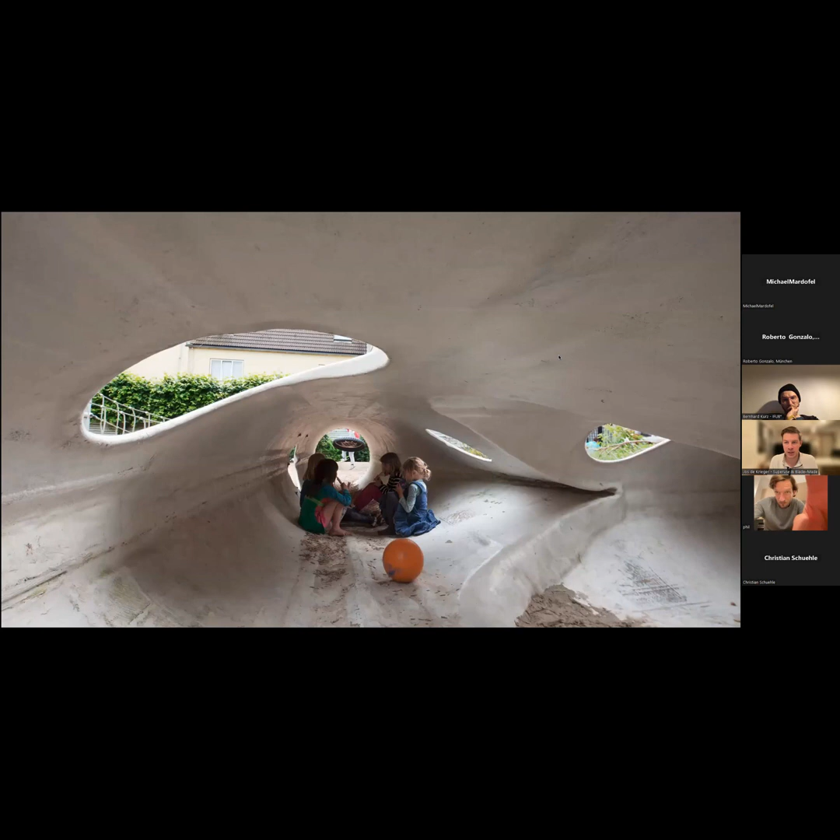There's a lot of work done to make it like this, but still, most of the shape, most of the space was given to us by the wind turbine engineers who designed the blades in the first place.

By doing this, we noticed that with reuse, we can roughly save 90% on carbon emissions compared to making this same playground with the same amount of playing facilities in a wooden structure with stainless steel tubes or stainless steel slides, etc.

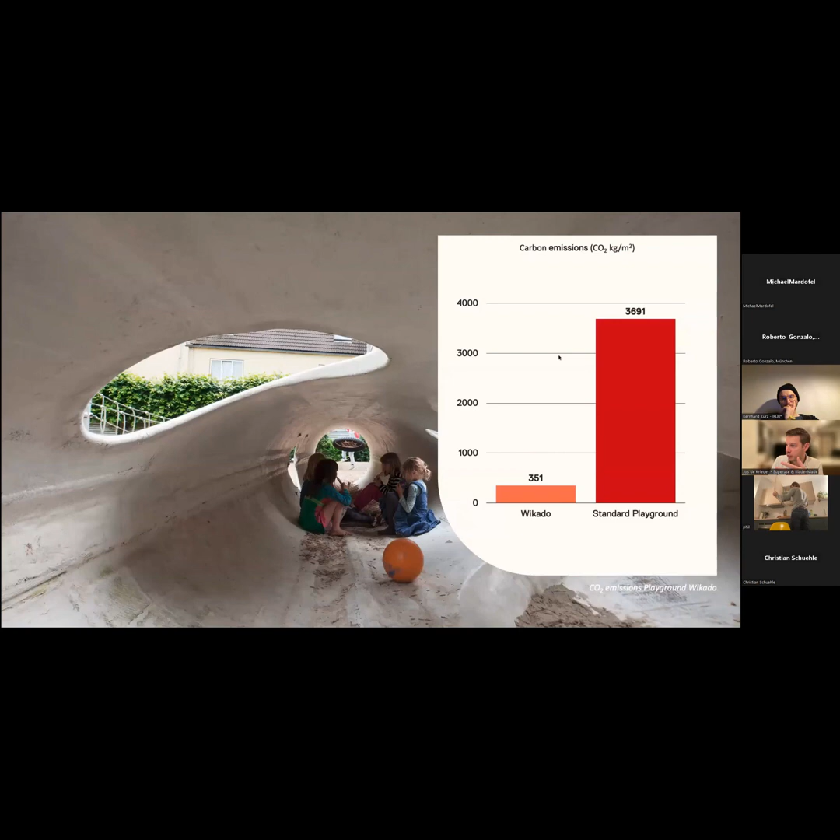Since we did this project, we've had other projects over the years, either with smaller blades, making urban furniture, where the nice thing is that with that blade shape changing all the time, there's basically a perfect seat for everyone, every person, independent of your length or width or whatever.

A couple of years ago, 3 years ago, it needed a paint job. Rotterdam was also looking for a place for an LGBTIQ plus monument, and we decided that 1 plus 1 would be 3, making our former red urban sculpture into that monument. It's been standing there on the square now for 3 years already, and it's still beautiful.

It's really interesting that, well, sometimes you hear in the news that things to do with rainbow colors tend to also attract negativity or graffiti or whatever, but so far we haven't noticed it with this object.

After that, we had another commission for a playground, now on a beach, a harsh weather environment that the blades are commonly used to as well. We've added some new things like climbing grips on the outside, which is doable, and a different kind of slide, because here we didn't have an original playground to reuse the slides from.

The municipality liked it so much that they also asked us for an artwork on the pier of the harbor, where we reused parts of the same blades, but now carving away an element, making a new piece inside. It's really nice when you see it like this—it still looks like a sculpture, but when there's a person standing inside, then you can actually see how high it is.

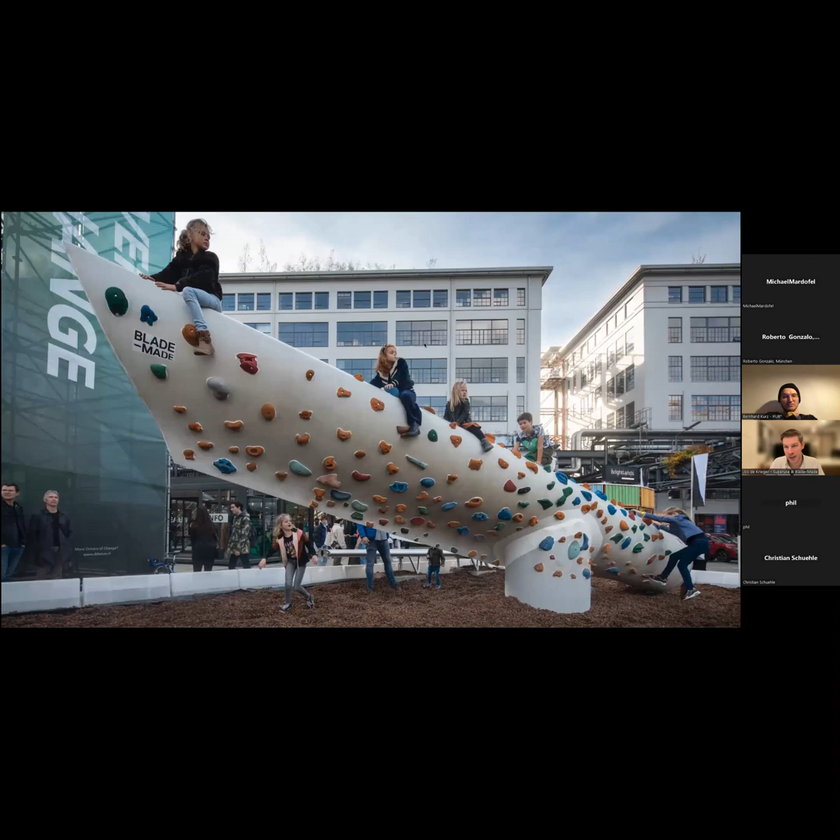With the generation of blades that we have now, we think that these solutions are feasible. But in the next 5 years, these blades will become bigger, also the blades that are end of life. So we should go beyond playgrounds, beyond benches, and beyond all these other small solutions.

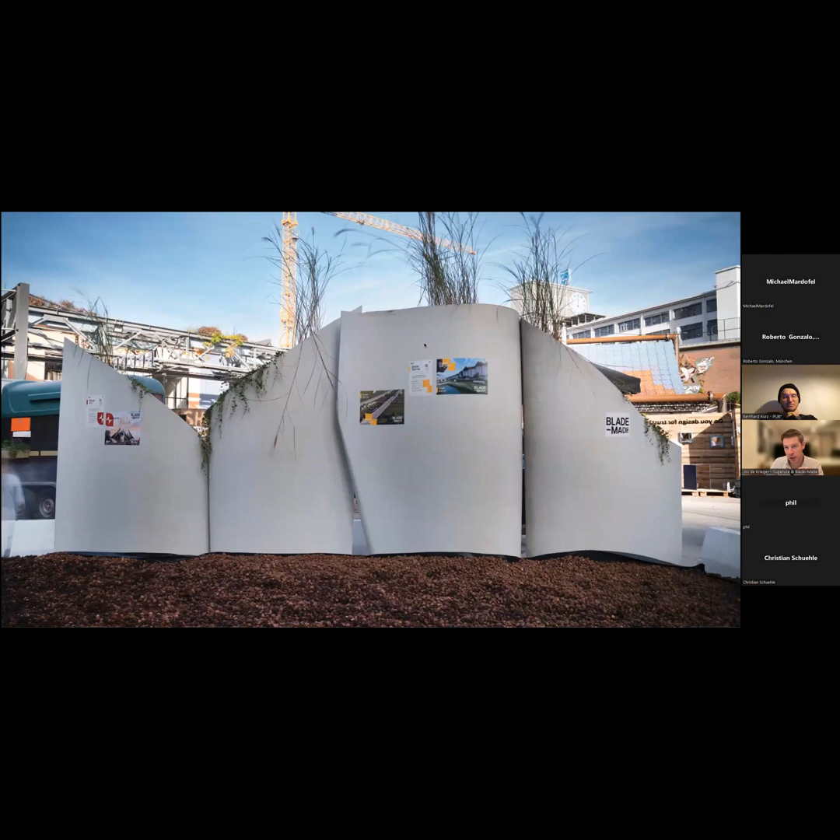So what we're working towards now is a sound barrier. And for us, that means something along the highway, preferably with plants inside that you can build along highways in high density city infrastructure.

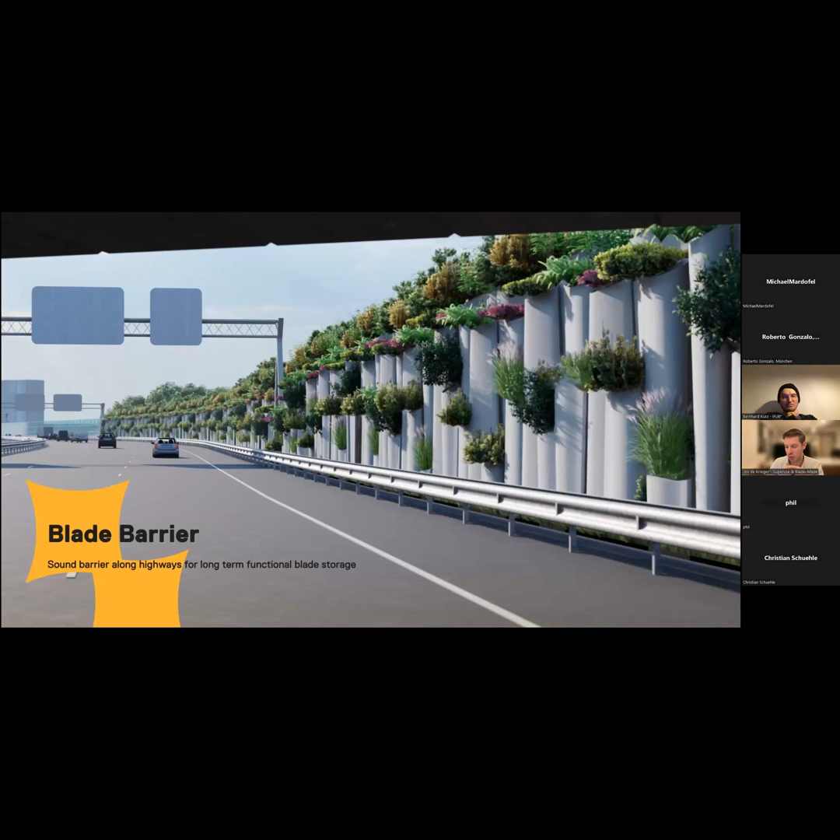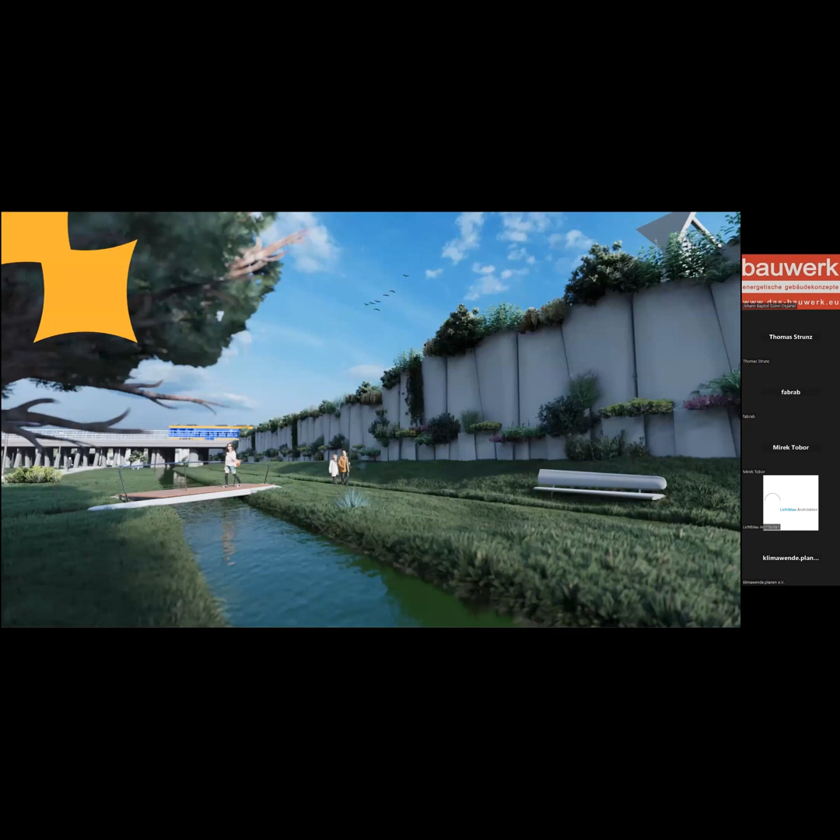For example, the Ring of Munich, the Ring of Amsterdam, places where pressure on the urban environment is high, and you can create a high quality public space next to the highway, because that is actually the most quiet spot. If you are 100 or 200 meters further, there will be more noise than right here.

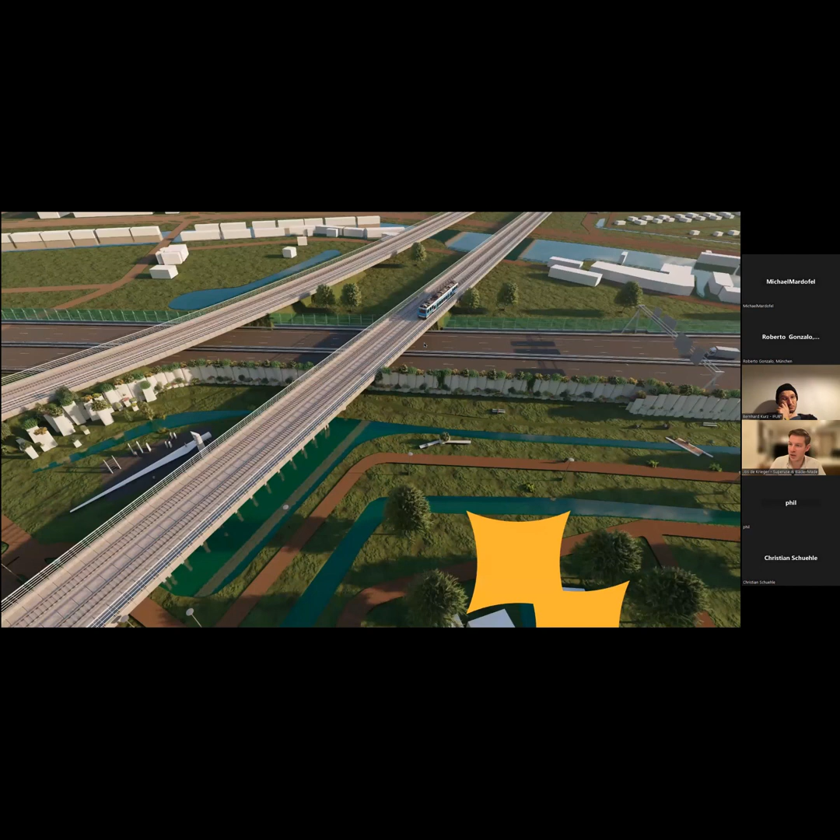Nowadays most of these spaces are places where you don't want to be because they are neglected, hideous, feel unsafe. We think that we can make high quality public infrastructure with high quality public space in one spot, adding the playgrounds, adding the benches as well with material that we don't use.

That is exactly what Bernhard mentioned in the beginning, where we got the Pioneer of the Year award for. I just looked up a few details on Germany: there are roughly 29,000 wind turbines installed, and they are still in their first life.

Which means we estimate 4,000 blades per year going to landfill. And currently, of course, there are repair and replace things in place, and that should happen, but incineration or landfill is just not the solution.

There should always be a Blade-Made solution in between before recycling. Also with the new blades that are coming up, where, for example, Siemens Gamesa is claiming to have a recyclable blade—that's all perfectly fine, but still, if it is recyclable, a second life, a repurposing solution, will always yield environmental results that are beneficial compared to recycling immediately.

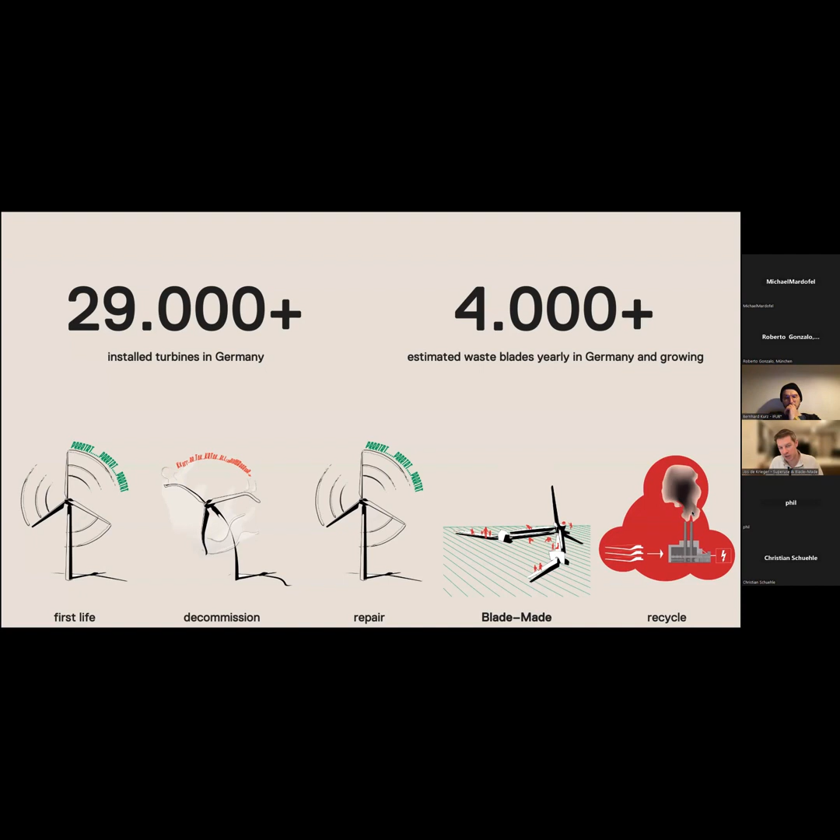Because you are replacing the use of virgin materials for 25 years or 50 years, and that helps us flatten the curve of global warming, of temperature increase. If we do that on a large scale, I'm really convinced that we can make a big difference. To achieve that, we are building circular value chains right now as Blade-Made.

This is our circular value chain in the Netherlands with a decommissioner, a big construction company, us as an architecture firm, a small construction company or contractor that does street furniture, a company calculating the carbon footprint of all these things, and somebody that helps with all the stakeholder engagement and everything around it that you need to manage.

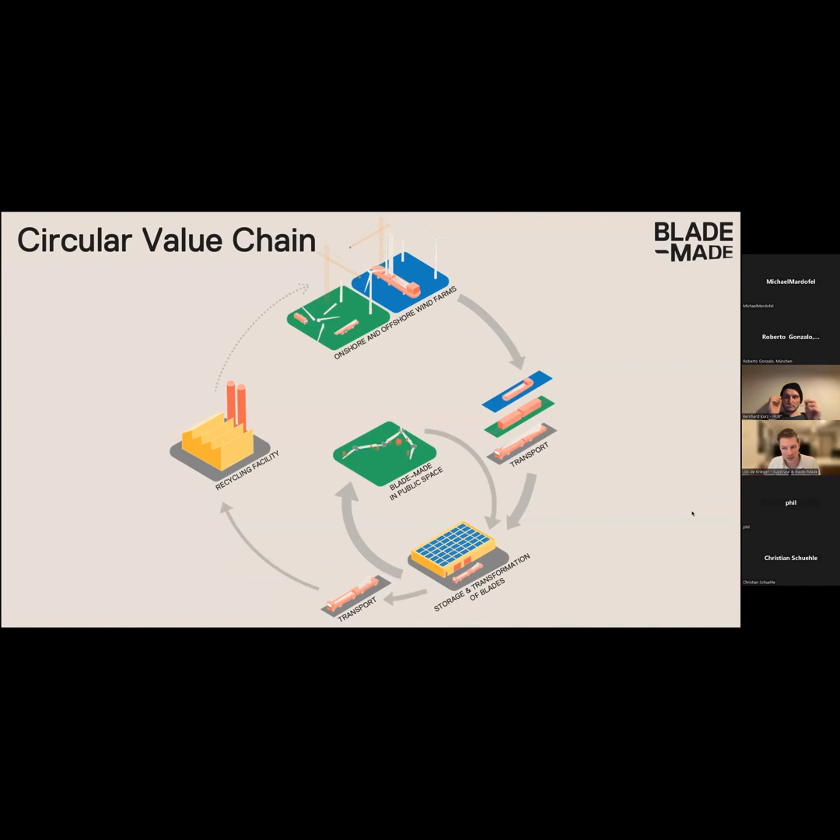I think we need localized circular value chains for all of these materials, and for Blade-Made we are actually pursuing that right now, not just in the Netherlands, but also in Germany, Austria, Sweden, Denmark, France, Spain. Wherever there are blades, we think we can build such a circular value chain.